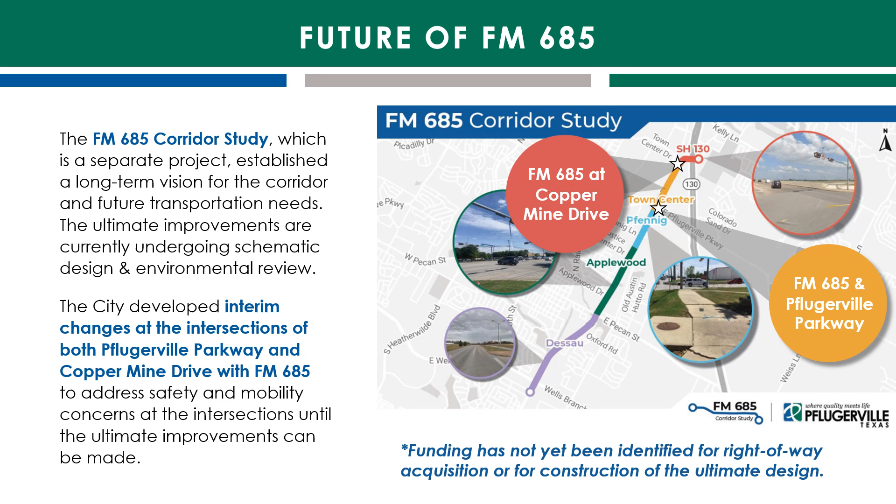To reduce delays at the FM 685 and Pflugerville Parkway intersection during peak hours, caused by a heavy volume of left turns onto FM 685, the interim changes would remove left turns from the primary intersection and construct two new signalized intersections on Pflugerville Parkway that convert these left turns to U-turns.

On FM 685 at Copper Mine Drive, the proposed changes will slow traffic turning right onto FM 685 from State Highway 130 and increase the number of through lanes from 2 to 3 from the intersection to Shops Road. The sidewalk will be extended from where it ends in front of Typhoon Texas to the existing sidewalk on the State Highway 130 southbound frontage road.

A shared use path, which is wider than a sidewalk and meant for use by multiple modes, such as walking, biking, and micromobility, will be constructed from the intersection to the shopping center, and a signalized pedestrian crossing will be added to stop traffic turning right onto FM 685 when pedestrians are crossing.

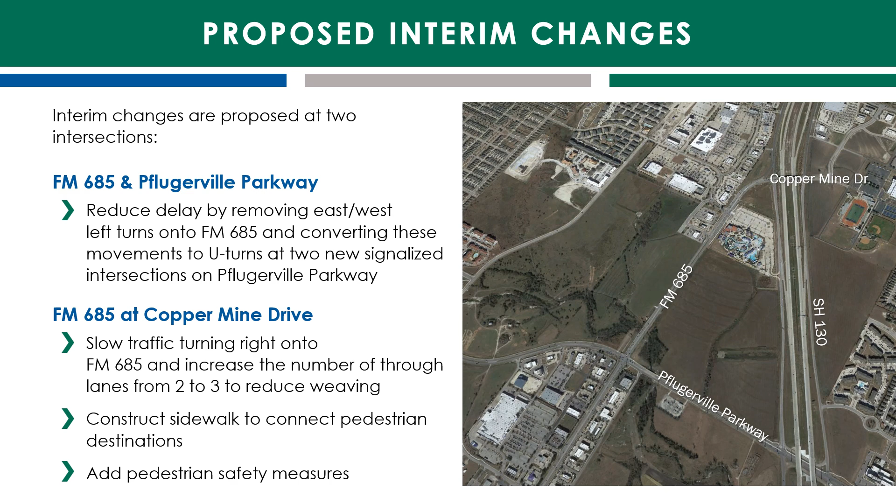Today, there are two through lanes and a left turn lane at all four legs of the FM 685 and Pflugerville Parkway intersection. A heavy volume of left turns from Pflugerville Parkway onto FM 685 in either direction creates significant delay at the intersection during morning and evening peak periods. In addition to increasing travel times, this congestion increases safety risks.

Drivers may be more likely to engage in risky behavior, such as not yielding right-of-way when turning left, increasing the risk of T-bone crashes, or more likely to rear-end another vehicle due to frequent starts and stops. Transmission power lines and utilities located near the intersection constrained the options available to improve the intersection. TxDOT also required that the traffic signal timing on FM 685 remain the same.

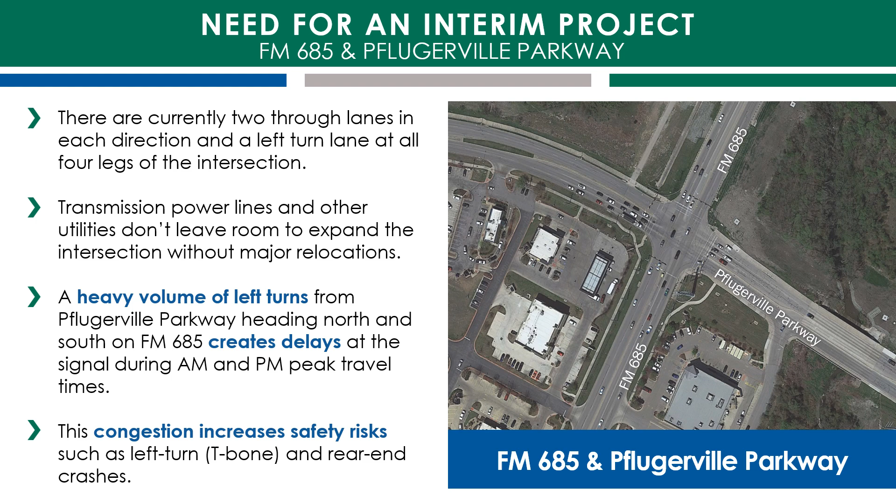Level of service is a measure used in traffic analysis to assess the quality of vehicle traffic flow and congestion based on a number of factors, including vehicle speed, density, and congestion. Currently, the intersection operates at level of service E and F during morning and evening peak periods. Level of service varies slightly for each leg of the intersection based on varying traffic volumes. The proposed changes are anticipated to improve this level of service to levels A through C.

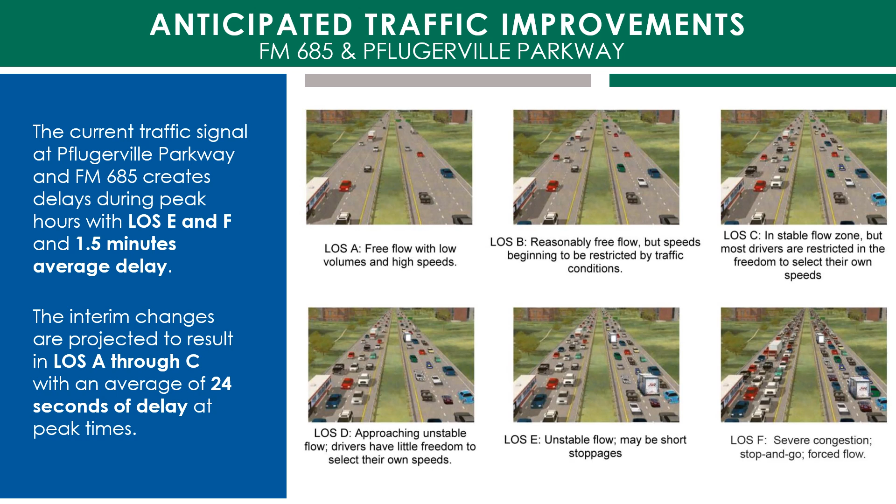The project team analyzed four options to determine the best interim option to address the safety and mobility concerns at the intersection. Performance criteria used to screen the options included impacts to existing and planned development, including the amount of right-of-way that would need to be acquired, mobility impacts for cars, bicyclists, and pedestrians, environmental and safety impacts, potential congestion relief, the cost to construct and maintain the design, and compatibility with future improvements.

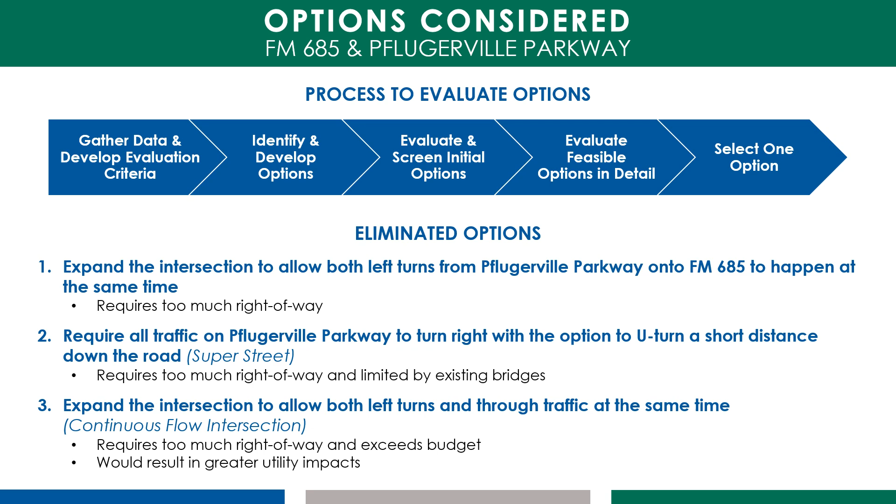The first two options, expanding the intersection and the superstreet design, were determined to have fatal flaws, as the limitations of existing bridges would have caused significant safety issues and right-of-way acquisition. While the third option, the continuous flow intersection, would have reduced delay, it would have required more right-of-way acquisition and utility impacts than the selected option. Additionally, the project budget did not allow for the bridge reconstructions that would be needed to accommodate the design.

Ultimately, the alternative determined to best meet transportation needs at the intersection was the median U-turn design, which would convert left turns from Pflugerville Parkway onto FM 685 into U-turns a short distance down the road. This design was selected over the continuous flow intersection because it minimizes the right-of-way acquisition and utility impacts required, is compatible with future plans for the FM 685 corridor, better maintains traffic during construction, and can be implemented more quickly.

As you can see from the graphic, instead of turning left, traffic on Pflugerville Parkway would proceed straight through the intersection and make a U-turn at a new traffic signal. The signals will only stop one direction of traffic to allow U-turn movements, allowing through traffic in the opposite direction to continue without delay. As shown by the orange arrows, a right turn lane will be added on the west side of Pflugerville Parkway approaching FM 685, and on the east side, the right turn lane will be extended from the U-turn to FM 685.

Business driveways along Pflugerville Parkway will become right turn in, right turn out only. A small amount of right-of-way is needed near each of the median U-turns. While this change will require some vehicles to travel longer distances along Pflugerville Parkway, they should experience faster travel times.

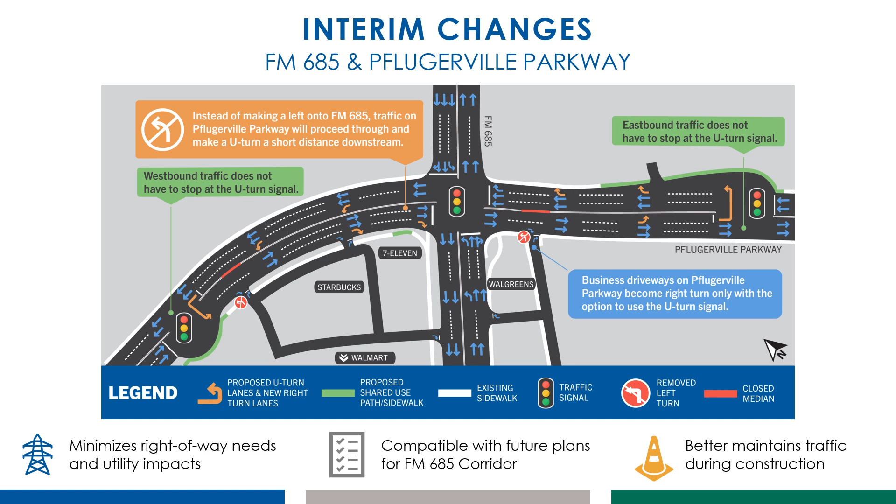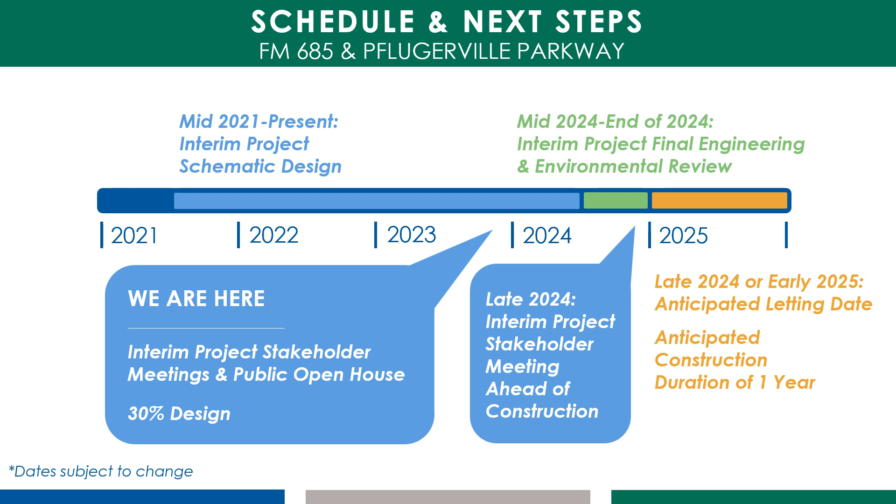Schematic design of the interim project, which has currently advanced to the 30% level of detail, began in mid-2021 and resumed in 2023 after a brief hold. Following this open house and completion of schematic design, the project will advance to final engineering and environmental review in mid-2024 and is anticipated to let in 2024 or early 2025. Construction is anticipated to take 1 year.

We will now focus on FM 685 at Copper Mine Drive. Currently, there are no sidewalks west of the intersection heading towards Stone Hill Town Center. Pedestrians from Hendrickson High School frequently cross this intersection, especially at lunchtime. Traffic turning right onto FM 685 from the State Highway 130 frontage road currently travels at a high speed into a right turn only lane. This lane drops after a fairly short distance, which requires vehicles traveling straight and turning right to move in and out of the lane at the same time. This weaving behavior increases safety risks for travelers of all modes.

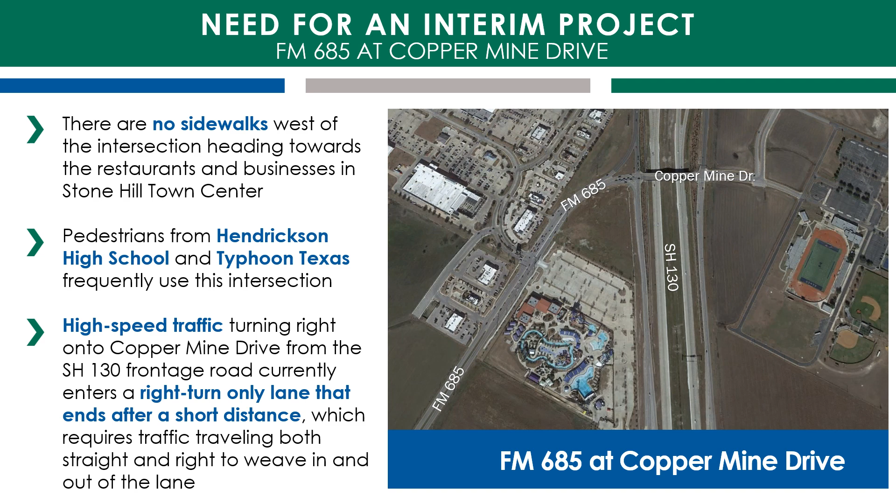The project team analyzed 3 alternatives to determine the best interim option to address the safety and mobility concerns at the intersection. These options were evaluated against the same performance criteria as those at Pflugerville Parkway. The first option considered constructing roundabouts where FM 685 intersects with the State Highway 130 frontage road in either direction. This option was eliminated because it required more right-of-way than the other options and did not improve mobility when accounting for the increased traffic volumes anticipated in the future.

The second option would increase FM 685 from 2 to 3 through lanes from the southbound State Highway 130 frontage road to Shops Road to address the short right turn only lane, and construct sidewalks connecting the intersection with Stone Hill Town Center and Typhoon Texas Water Park. The selected option includes both elements from option 2 and additional elements.

In addition to expanding through lane capacity, as shown by the orange arrows, and sidewalk connections, as shown in light green, the option determined to best meet transportation needs at this intersection also reduces the angle of the State Highway 130 southbound frontage road right turn lane to slow traffic approaching the intersection. A pedestrian crossing signal will be added to stop that right turn traffic when pedestrians trigger the signal. The additional through lane and now dedicated right turn lanes into Stone Hill Town Center will address current mobility challenges in the area.

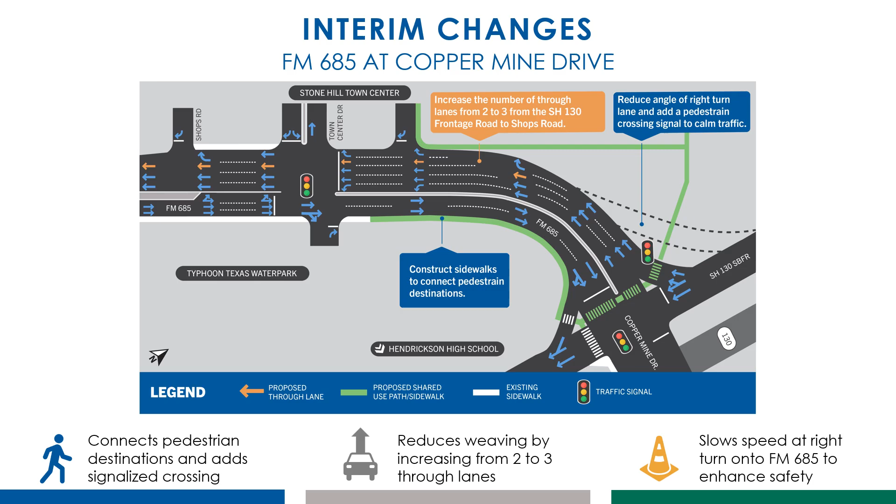Schematic design of the interim project began in August 2021 and was completed in May 2022. The project is currently in final engineering and environmental review, which are anticipated to complete by May 2024. The project is anticipated to let shortly afterward, with construction from July to December 2024. Additional coordination with affected stakeholders will occur before construction begins.